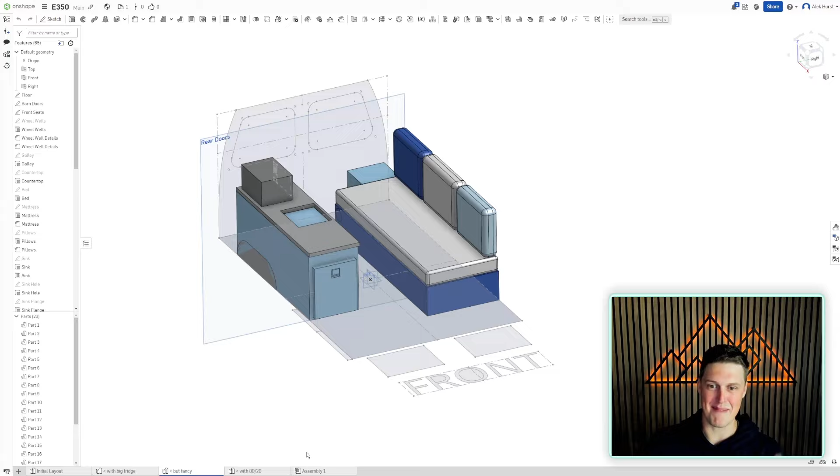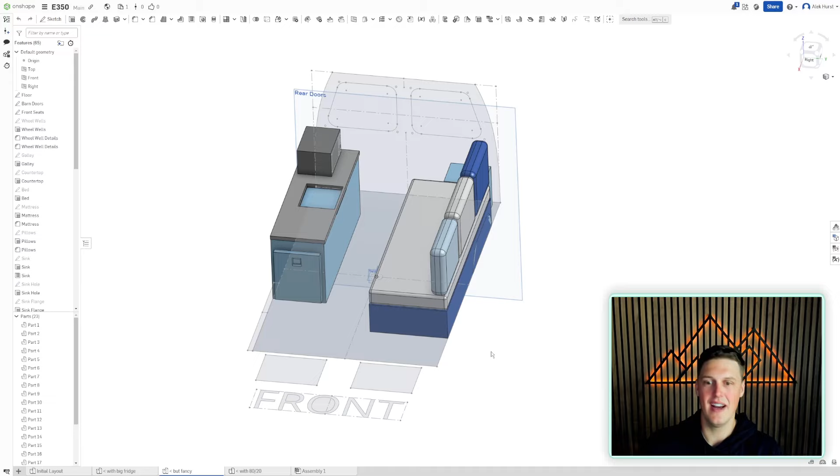This right here is the current version of my newest van layout, the E350 that we are doing on this channel. But this particular video is not going to be talking about my layout. This video is going to teach you the bare basics on how to create your van layout. First part of the video, I'm going to talk about why OnShape and why this is my new favorite tool for designing vans. And then we are going to get into the tutorial section where I have basically stripped down all of the complexity from OnShape into only a couple of different tools that you'll need in order to actually achieve an entire van layout.

Okay, so part one of the video, why I think OnShape is the new best tool to design your van layout. I've had this channel for, I don't even know now, 5, 6, 7 years, something like that. In the last couple of vans that we've built, I've shown you how to design your van layout in a tool called SketchUp, which is a very similar tool to OnShape. And I used to think it was the best for designing these van layouts. And actually, when I first started getting into the design for this particular van layout, I first started by going to SketchUp since that was the tool I knew and loved.

And I tried to get started, but it turns out that since I've used SketchUp the last time, which was about 3 years ago, a ton of stuff has changed. It's like kind of free, kind of not free now. There's tons of upsells in the product. They've completely changed the UI. And within about 5 minutes, I realized, okay, this is no longer the tool that I want to use for my van layouts.

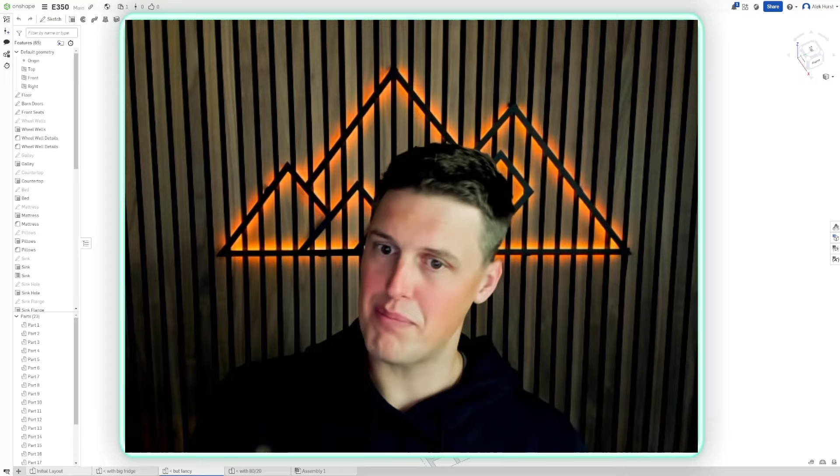Next reason why I think this tool is great is not only can you design your van, but you can graduate from designing your van into designing real engineered parts for a 3D printer. That might sound crazy to you. You might think, oh, I'm never going to get into 3D printing. In this day and age, 3D printing is getting more popular. It's actually incredibly useful for just designing little one-off parts for your van build. And if you start by learning OnShape right now, it's going to be way easier for you to design and print your own 3D parts if you ever decide to do that in the future.

And then last reason is kind of a bonus, but they do have a great mobile app, which is also free. I've been known to pull that up when I'm on a dinner date with my girlfriend and start blabbing about the van build and all the different things that I've thought about.

And that may or may not be her least favorite feature of OnShape, but I think it's really cool to just have the rendered 3D design on your phone so you can pull it up and look at it if you're kind of in that headspace and you want to think about a trade-off or make a different design decision. So that covers the initial blab session and why I think OnShape is now the best tool to use. Let's go ahead and dive into the actual tutorial here.

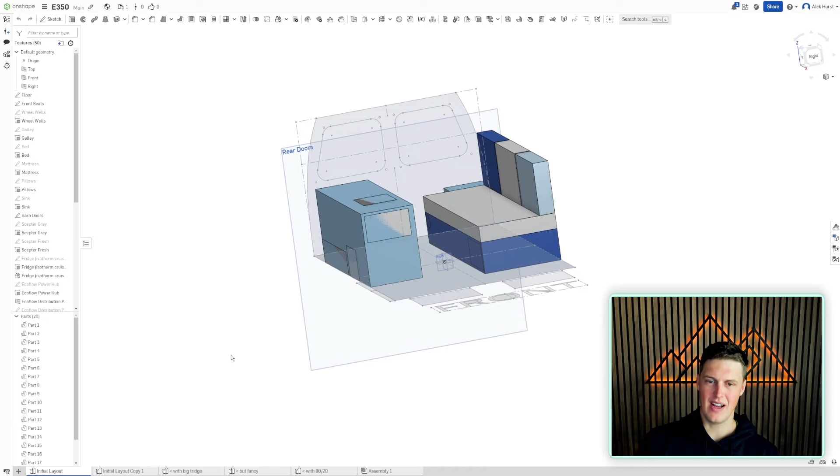Okay, so we're gonna start from a completely clean slate. I'm gonna go back to my OnShape home screen. This is where you're gonna get dropped into the moment after you create your free account. You're gonna go to the Create button on the top left. You're gonna go to Document. We can just call it Tutorial.

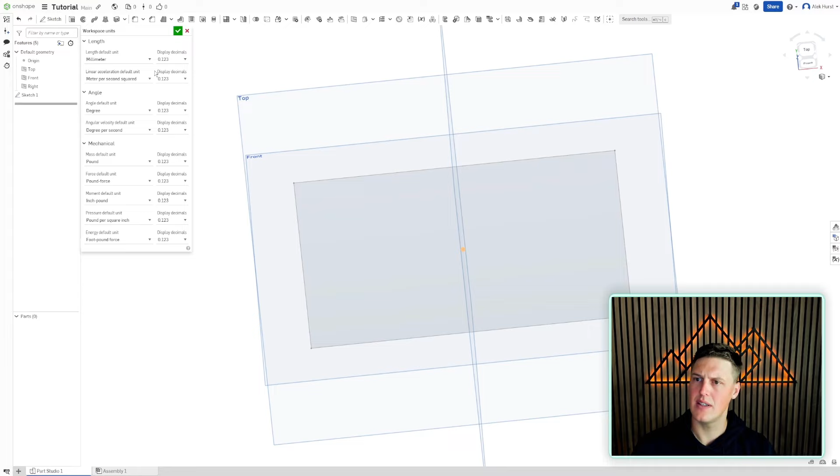Create Public Document. Oh, I do wanna make sure that our document here is in inches and not millimeters. I work in millimeters when I'm designing small parts and I work in inches when I'm designing big stuff. So to do that, I think we come up here, we go to workspace units, and what do you know? It's in millimeters, so change it to inches.

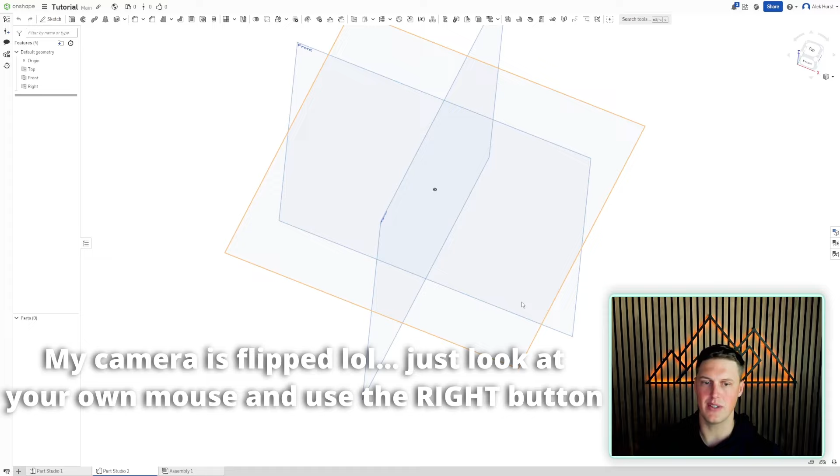So before we start actually designing anything, there's two functions that you're really gonna need throughout the entirety of actually building stuff. First one is being able to rotate the screen that you're looking at, which you do by just holding the right mouse button, this one right here. Hold it down, drag your mouse around, you can rotate the design. You can also use this little widget up here to do rotation of the view you're looking at. And if you click on a particular surface here, like top, it will rotate the view to look at that particular surface.

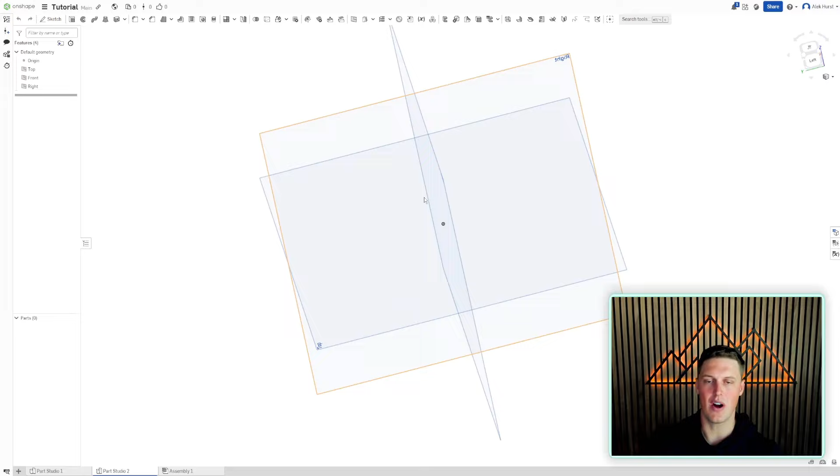Next thing we're gonna do is pan, which is different than rotate. This one's rotate, this one's pan. You can pan your drawing by clicking down on the scroll wheel of your mouse in the middle of your mouse and dragging your mouse around, just like that.

So the first mission that we have is to create the floor of the van. But in order to do that, I need to take a step back and teach you guys the first tool, which is kind of the core foundational tool to OnShape. That is called the sketch tool. The best way I like to think about it is it's basically just a piece of paper. And as with a piece of paper, you can draw any two-dimensional shape on it.

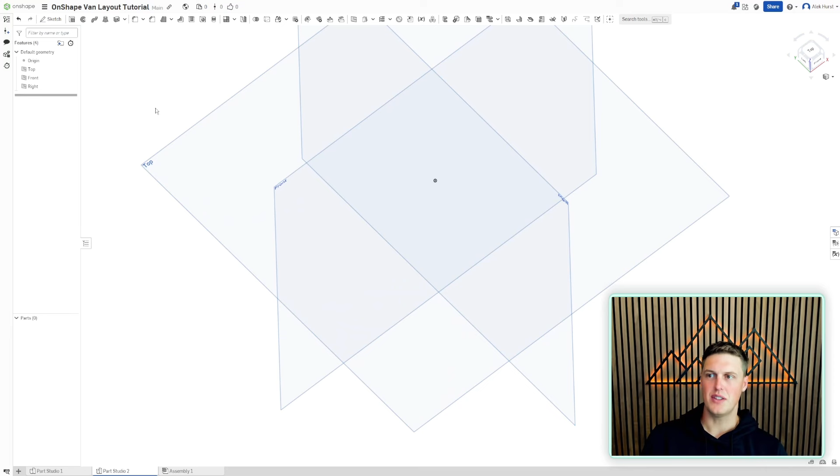You can use the sketch tool by pressing this button on the top left here, and you have to assign the sketch to sit on a particular plane. So let's select the top plane. And at this point, you can draw any two-dimensional shape on this sketch, just like this. Then you can apply different operations to these two-dimensional shapes, such as an extrude, to eventually create three-dimensional parts.

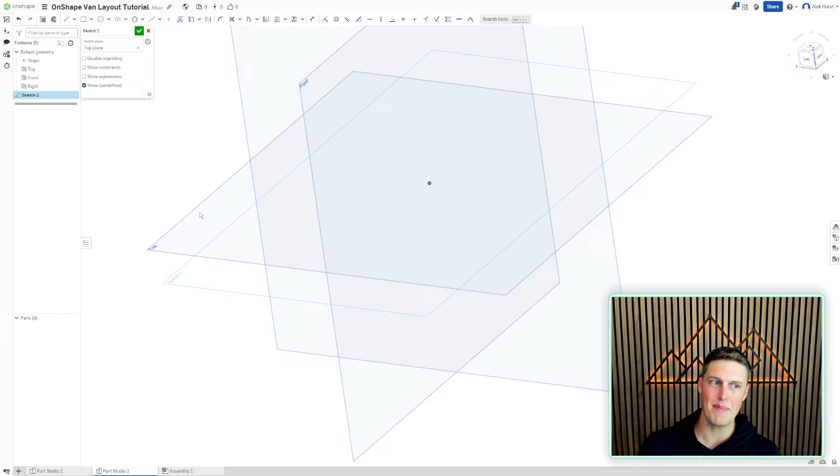And the reason that you have to start with a sketch and a two-dimensional shape in any real CAD tool, such as OnShape, is because it just forces you to take each step explicitly. It gives you a lot more fine-grained control and ability to go back and change things while leaving the entire design to exact specifications. I know it took me a while to understand what a sketch is and why you draw your two-dimensional stuff on there first. I think it'll make more sense as we progress through the video. So we have our first sketch. Let's go back to the top perspective here.

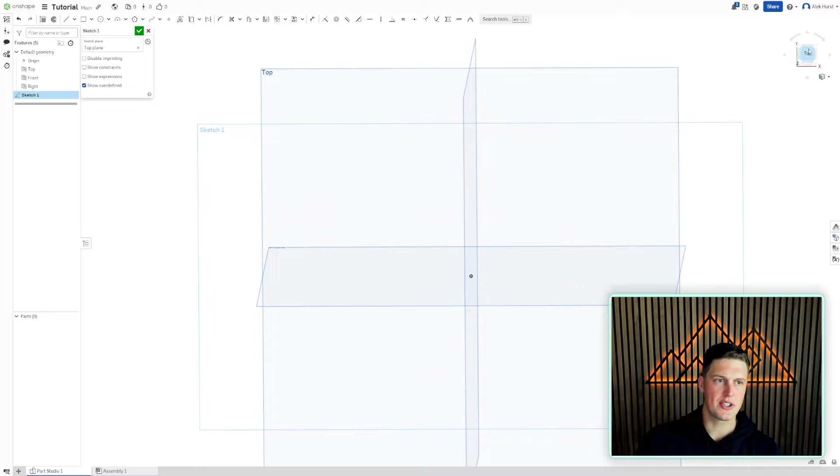Now, if we want to create the most basic version of our van floor, we need to first go get the dimensions of our van floor. If you're working with a modern van, like a Sprinter van, the dimensions for your particular van are readily available on a ton of different places. For us, with our E350 van, I had to go out there and use a measuring tape because, believe it or not, I had trouble trying to find the dimensions of the floor and the ceiling space on the internet.

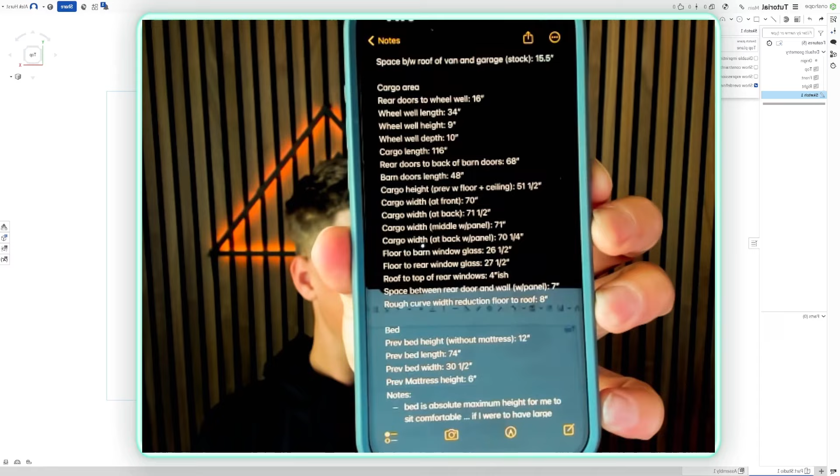You can see here, I took a ton of measurements on my phone. Hopefully that's clear enough on the screen to actually see. But I just went in there, went buck wild with my tape measure and got as many different measurements as I could get. And we are now going to create a rectangle that represents the floor of our van on this sketch. So we're going to draw a rectangle on the piece of paper, is how I like to think about it. You have to have the sketch open so that we can draw this rectangle within the sketch.

Then you'll see this rectangle tool. Click center point rectangle. Click the origin. You'll see it highlight orange when you have it fully selected here. The origin is just the very center of this entire three-dimensional space.

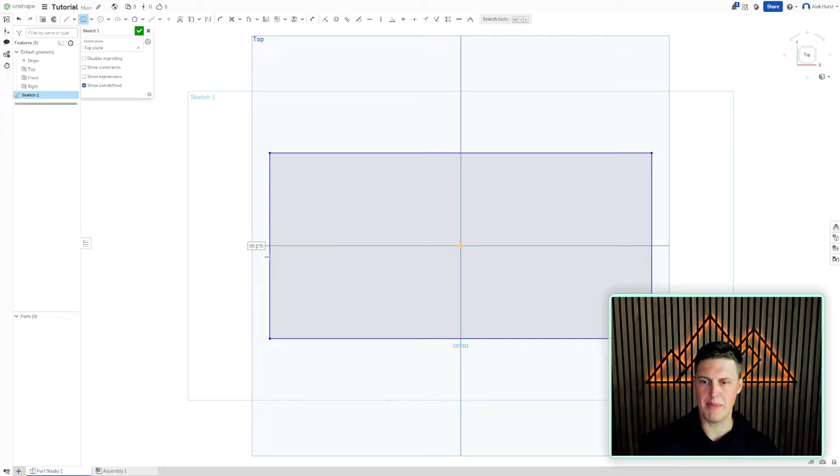If you click the origin, it sticks the center of our rectangle to the center of space, and you can just create a rectangle. There's a couple of ways to basically assign the dimensions that we've measured to the rectangle. We haven't done anything after we created the rectangle here, so you can see the dimensions are highlighted. If you press 0, it'll let you modify that text field. Don't ask me why you have to press 0 first, but that's just what you have to do so that you can edit the number here.

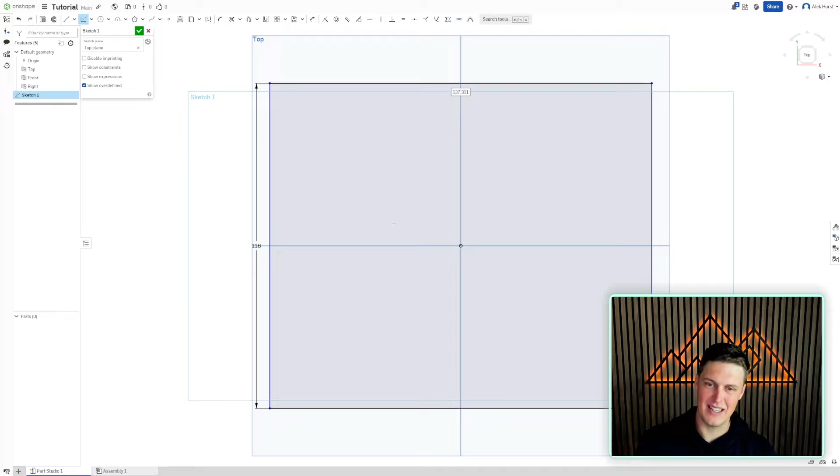Our cargo length is 116 inches. Oh, shoot, that was width. Let me redo that real quick. Center point rectangle, click origin, drag it out. Now we're on length, 116 inches long, and then 71 inches wide. So this is our cargo area.

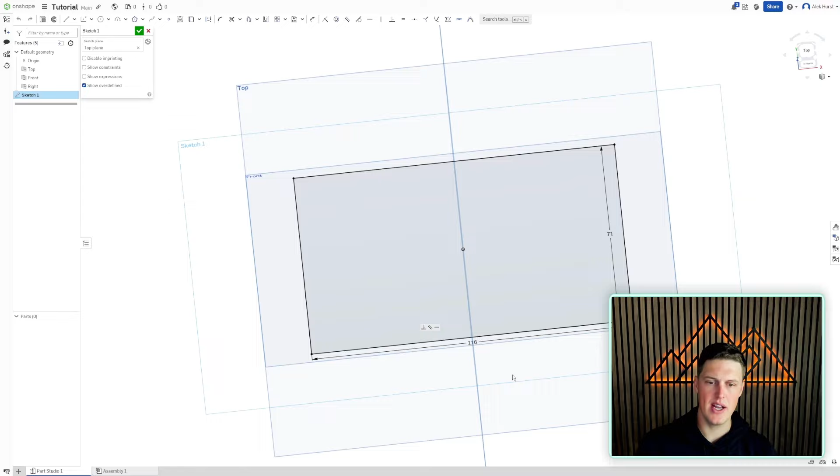If we click the check mark here, that basically just says we're good for now, but you can always go back into this sketch. You can change the dimensions, which is really nice when we start moving stuff around. So now we have our two-dimensional floor in sketch 1. We can right click it, rename it, call it floor. We have our floor. Now we want to create a galley unit on top of the floor.

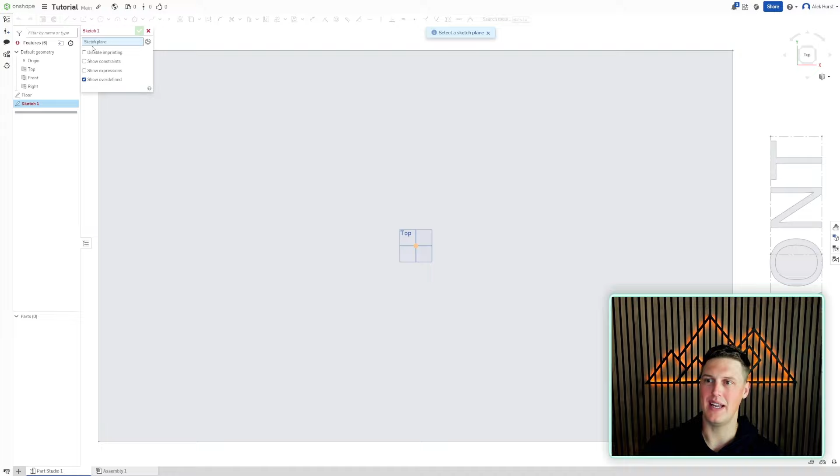What do we do when we want to design things on a two-dimensional piece of paper? We create a sketch. We need that sketch to exist on a plane. This time, we want that to be the plane of the floor itself. So we clicked on the floor rectangle that we just drew. We can create our rectangle, which will represent the galley unit. Let's go ahead and do a corner rectangle for this one.

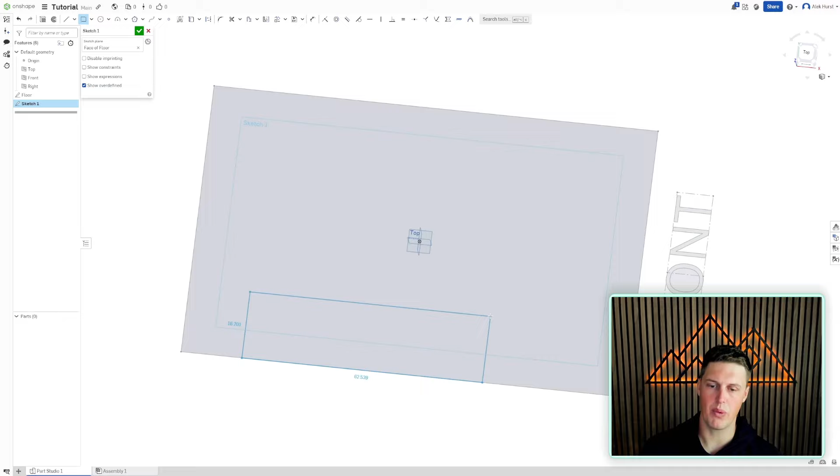Now, if we basically hover over one of these lines on the floor that we just created, you can see it turns yellow. That means that the rectangle that we're creating is going to be bound to that line, which is what we want in the case of the galley unit, since we want it up against the wall. So I'm hovering over this line, I'm clicking, and I can drag this corner rectangle out. Let's drag it to about there.

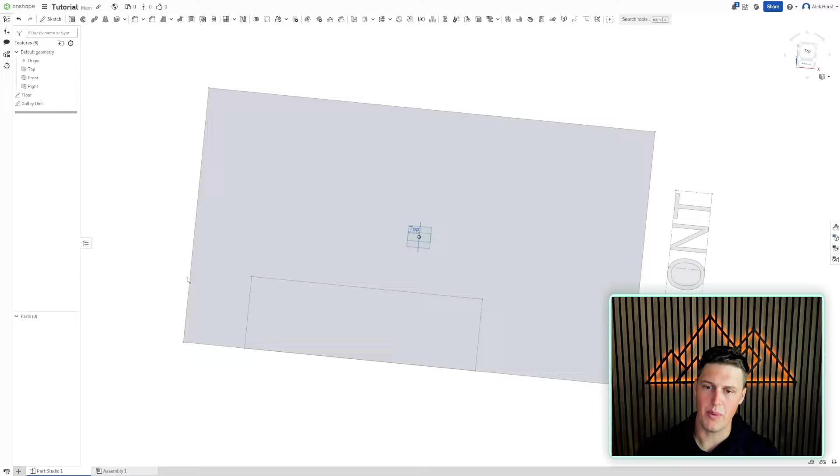And the dimensions of the galley unit that we want to create for this tutorial, it's going to be 60 inches long, 20 inches wide. This is a small van. You'd make a bigger one in a Sprinter van, but in this E350, our galley unit needs to be teeny tiny. If we press check, we'll rename this one to galley unit. We have two pieces of paper laid directly on top of each other, one of which has the floor and the next one has the galley in it.

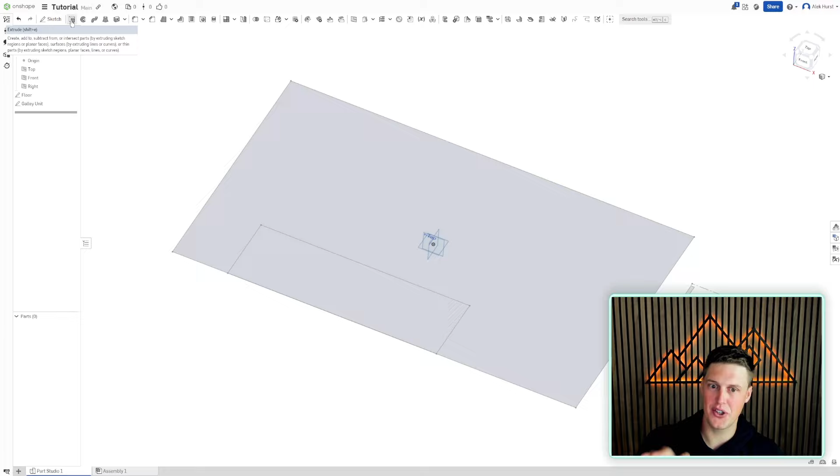If I kind of hover around, I can hover these shapes individually, which is going to lead us into the next tool, going from two-dimensional space to three-dimensional space. The way that we're going to do it, and that you can use to design 99% of your van, is going to be the extrude tool. The extrude tool takes a two-dimensional shape that you've drawn on a sketch and extrudes it into the third dimension. So we can click the extrude tool.

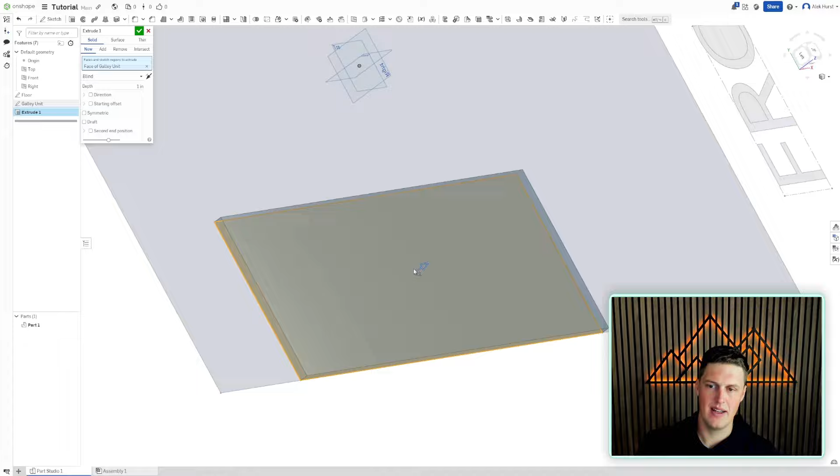We can click on the galley unit that we just drew. Let's see if we can get a good selection here. See, it's selecting different things as I hover around. We want to have it so that the box or rectangle that we just drew highlights in yellow. I'm going to click that. And you can see that it's now starting to extrude into three-dimensional space. They give you a bunch of different options here.

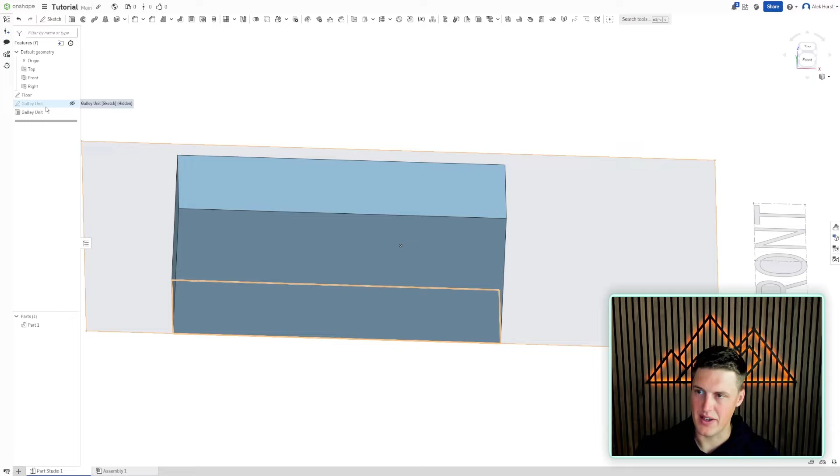We're not going to change any of those options except for the actual depth, which in our case is going to correspond to the height that we want the galley unit to be. 26 inches. This is also the galley unit. I'm just also going to call it galley unit. You could call this galley unit extrude and call this one galley unit sketch, but I just prefer to have them all called galley unit, and I get used to what these icons mean, and I can find the sketch or the extrude depending on what I'm looking for.

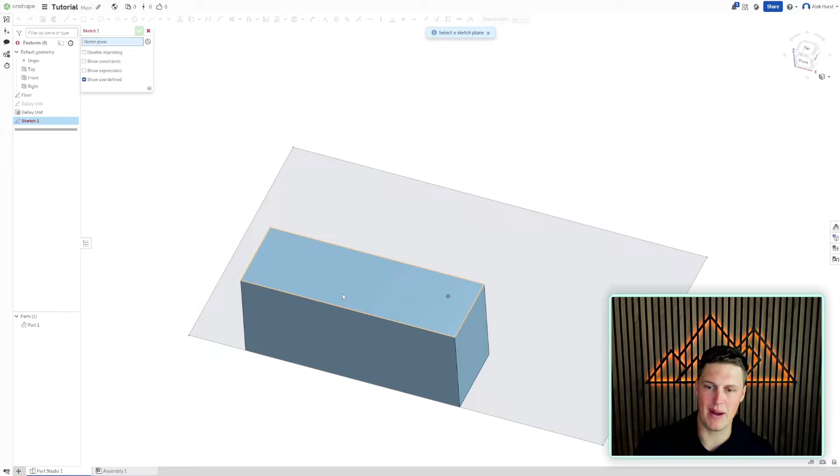Okay, so the next task that we have is to add a sink to our galley unit. That's going to work very similarly to how we just created the galley unit on the floor. The only difference is, let's create a new sketch by clicking the button here. The plane that we want this sketch or two-dimensional version of the sink to exist on is the top of the galley unit. And we're focusing on keeping everything in the shape of a box because honestly, that's the best way to do a simple version of your first van layout.

Make sure you still have your sketch open, click the rectangle tool, and we can draw a rough rectangle. The particular sink that I'm using, I'm going to link that in the future build videos, but it happens to be 18 inches by 18 inches.

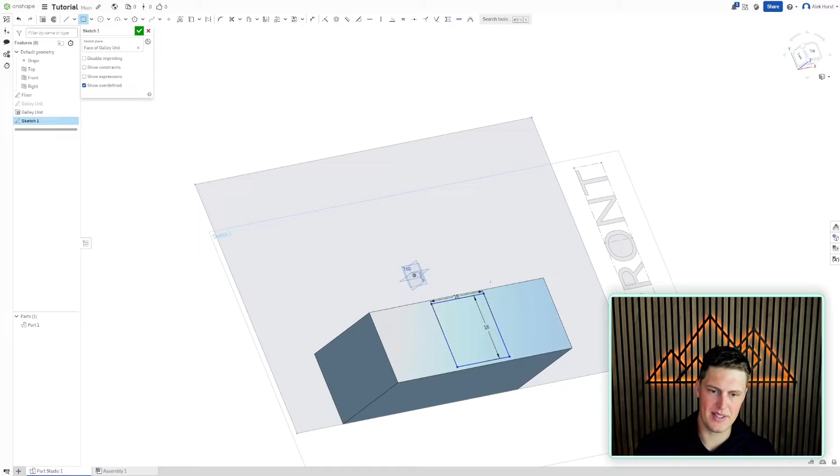You can see that it kind of centered itself perfectly on the galley unit, which is ideal. Let's say that this rectangle got created in a bad spot, so I'm going to delete it and recreate it over here, where we know it's not going to be where we want it. 18 by 18 inches. In order to move this square to the right place on the countertop, you want to highlight it. Then you want to press the drop down on this tool right here. Click the drop down, and you want to select the transform tool.

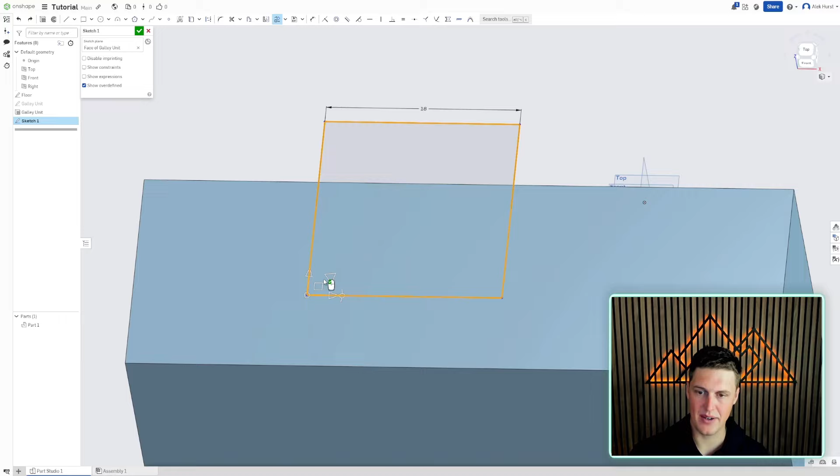Then these little handles are going to appear on the two-dimensional shape that we just created. There's a few different options here. You can move it in one direction. This will force you just to go up and down. You can move it in the other direction. You can force it to move just left and right. You can drag this square here, which lets you move it in both X and Y directions.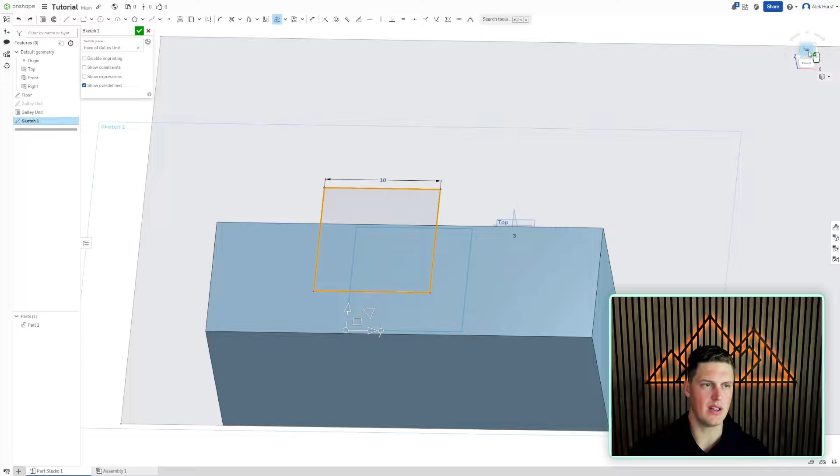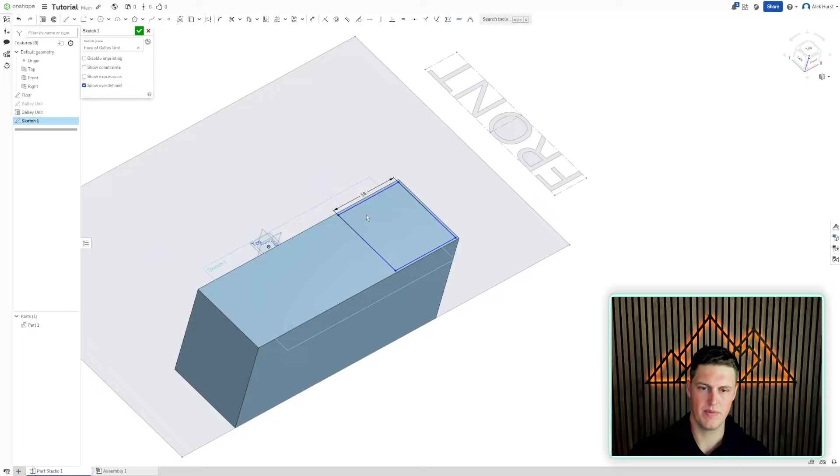And it's kind of hard to tell exactly where we are. So let's click the top perspective so that we can look exactly how this thing is relative to the galley unit. Let's put our sink over here where a lot of people decide to put their sinks. It has a little mouse icon with the green check mark on the top left button of the mouse. So I'm going to click, and that effectively moves our sink on this sketch plane to a new place. Let's go ahead and say we're good. Let's rename this to sink.

And in the same way that we created the galley unit, let's extrude the sink so that we have a three-dimensional object. It's going this way. We want it to go down into the galley unit. So we're going to click this arrow. This is opposite direction.

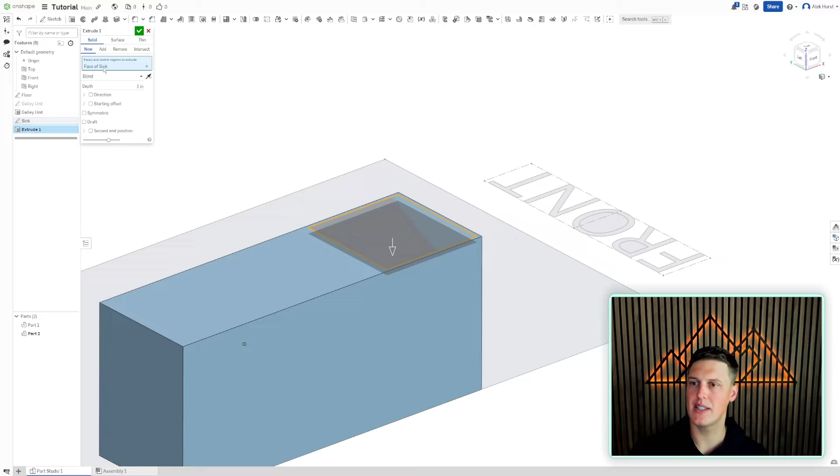Something a little bit complex here. When you're doing extrusions, you can do all sorts of different types of extrusions. We want to make sure that every single time we're doing an extrusion, it has the new selected. That is going to create a new object out of the extrusion and allow us to change this sink independent of any of the other objects that we've created. Anyways, make sure the new tab is selected. I believe my sink is 9 inches deep. So let's do 9 inches of depth and we'll press done.

And at this point, you might be like, okay, I'm very confused. Where did the sink go? I can only kind of see it at the top of this counter. Well, you can see in the bottom left here, we just click this little eye and it will hide and unhide, which doesn't change any of the engineering here. It's just like a visual hide and unhide.

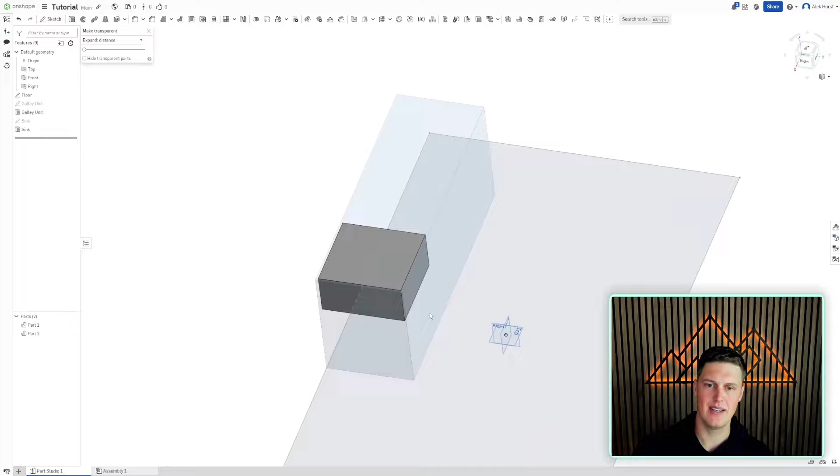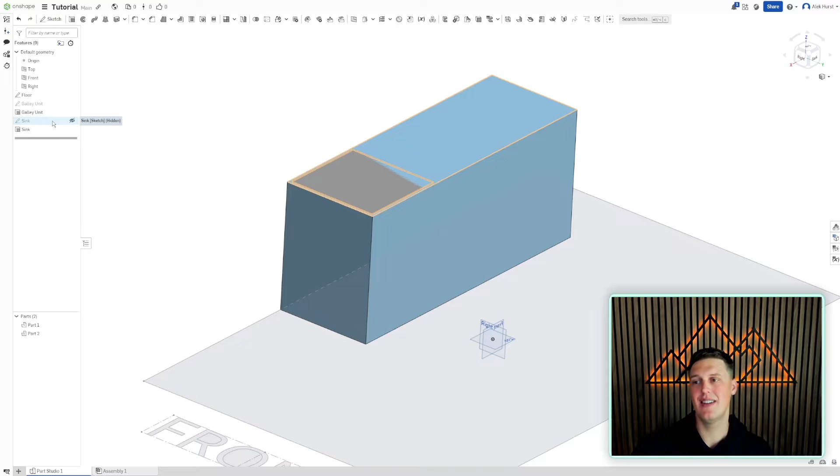The top left list of items here is our timeline of operations that we've done in this document. So the very first thing we did, the floor, is always going to stay at the very top here. It's the first operation that we did. Then we did the sketch for the galley unit, the extrusion for the galley unit, the sketch for the sink, and the extrusion for the sink. As you create more steps, they will automatically grow from the bottom here. And in our very simple use case, we're not going to be dragging these things around or changing the order of things. You can just always create new sketches and new extrusions, and it's okay that they fall at the bottom.

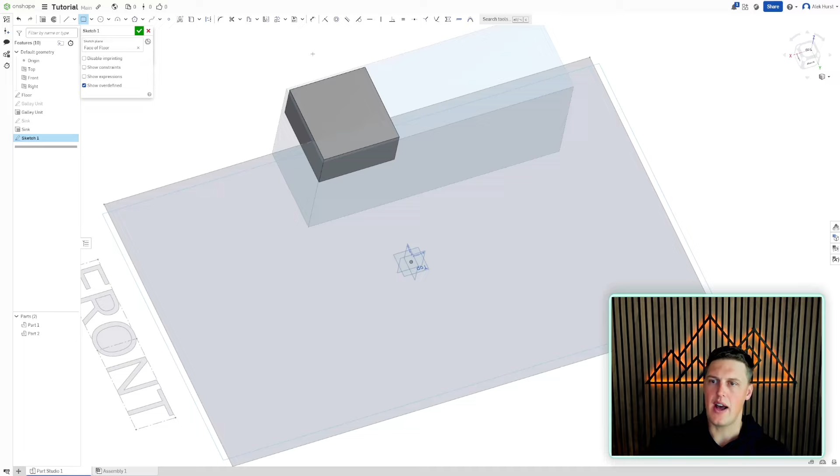So now let's go ahead and add a fridge to our galley unit. Let's go ahead and create the sketch. We're going to draw a rectangle, 24 inches wide. For simplicity's sake, let's just call it 20 inches deep. Extrude. Make sure to press new. Call it 22 inches tall. Our fridge. And as you guys can see, we're really just doing the sketch, draw a rectangle, extrude that rectangle for every single component inside the van.

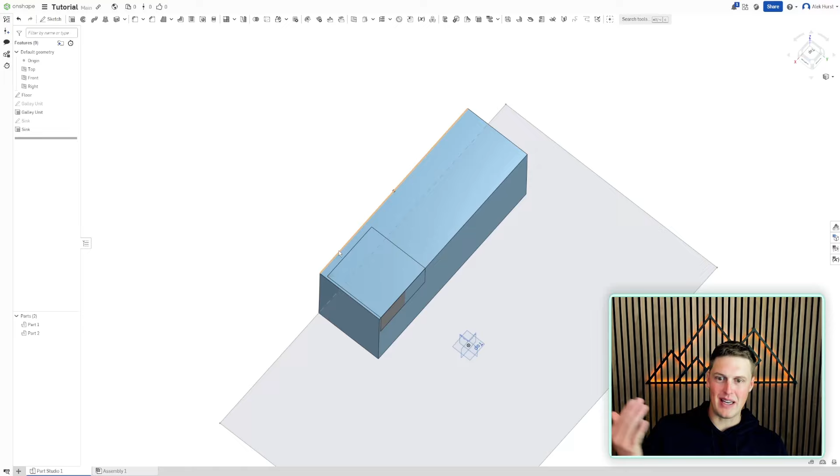For the next lesson here, I'm going to explain a feature of Onshape that you're going to need a lot as you're designing your van build. And that feature is determining the distance between 2 points or 2 lines. In Onshape, this is very, very simple. You just click line number 1 and you click line number 2. And in the bottom right-hand side of the interface, it shows you how much distance is in between those 2 parts. If you select a bunch of things and you want to get the things deselected, you've got to find an open space that has nothing behind it and click that.

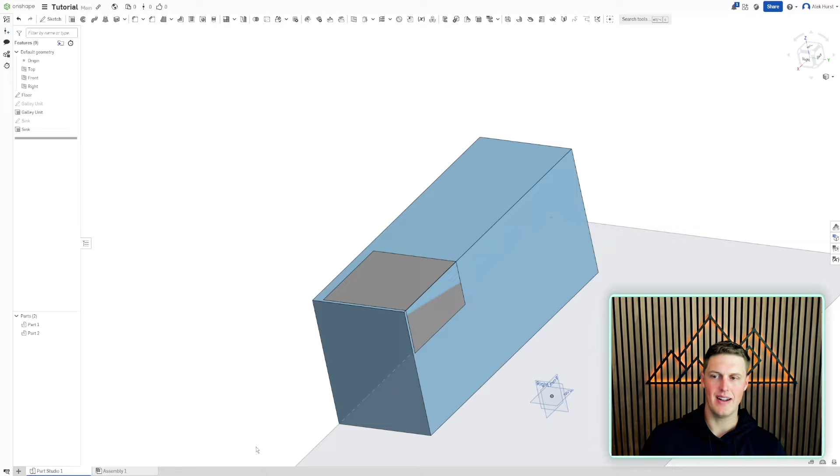That is the only way to deselect your selection. So if you've measured something and you've realized, I want this to be a different distance, I will show you guys how to do that right now. Anytime you need to change something, the first way you want to think about doing that is by going back into the original sketch. So if we want to change the distance this sink sits inside of this cabinet, let's go back into the sink sketch.

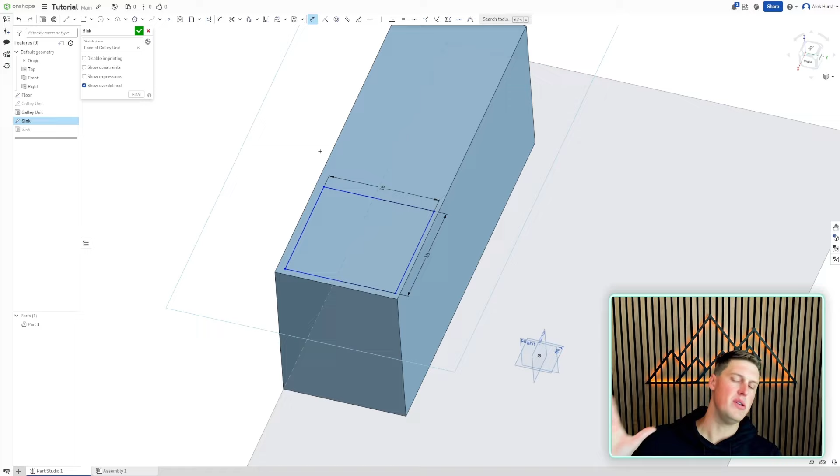So I've already taught you guys the transform tool, which allows you to just drag this thing around to have a rough placement of where you want it. But if you want this to be an exact distance from, let's say, the back of this counter, we're going to use what's called the dimension tool. The dimension tool is like this automagical tool. You can do angles with it. You can do dimensions of a shape. You can do dimensions between shapes. And it's kind of just smart.

So the way that it works is you just click the things that you want to apply a dimension to. In this case, click this line, which is the back edge of the sink. And we click this line, which is the back edge of the counter. And that gives us a number that we can enter here. Let's call it 1.5 inches. If we enter that, it perfectly places the sink 1.5 inches from the back of the counter.

The challenging part about the dimension tool is this is going to bring us into the world of what are called constraints. So each one of these dimensions is a constraint on this particular sketch, but there's lots of other ways to provide constraints as well. And what you often run into is a much more advanced topic. Let's say we put a second dimension between the sink and the counter and we call it 1.6 inches. The sketch fails to resolve and you can't move forward.

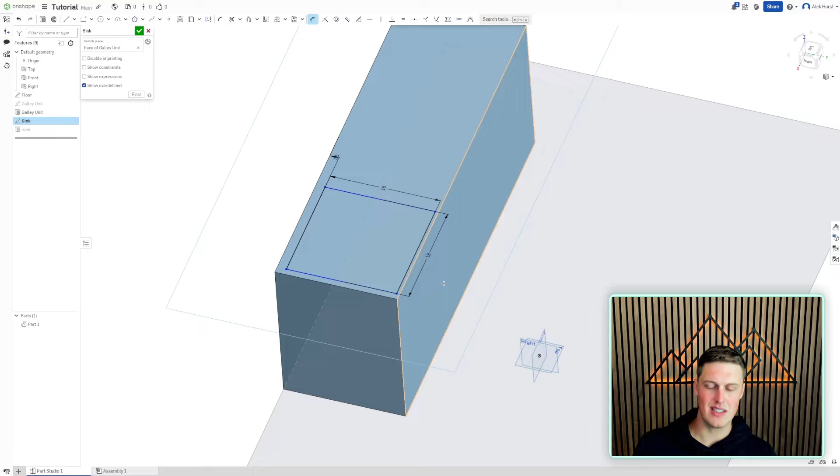If your sketch does turn red like this, you basically have to delete constraints until it can resolve itself. And if you can't delete the constraints so that it can resolve itself, which does sometimes happen just due to the nature of how complex this is, thankfully, I've taught you how to keep these sketches very simple. Just delete this singular sketch and recreate it.

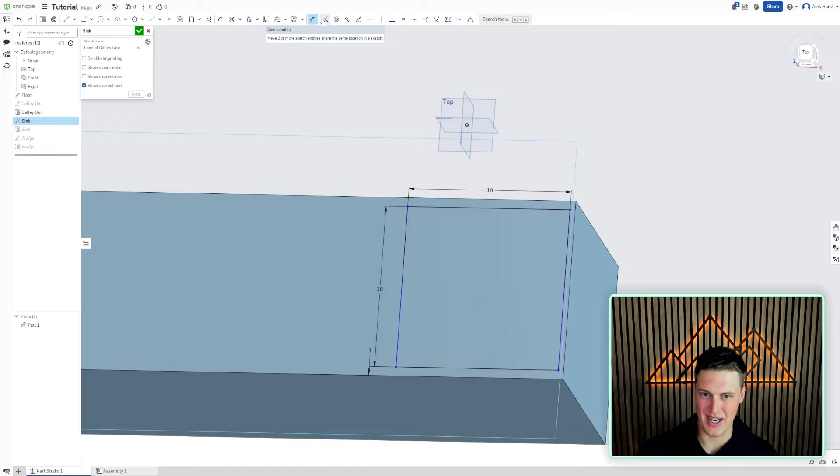Very last tool that I want to teach you guys is somewhat similar to the dimension tool. When you add a dimension, it creates a constraint for that particular portion of the sketch. We're also going to teach you guys a new tool to create another type of constraint on the sketch that happens to be very useful when you're designing a van layout. That is the coincident constraint. So we still have the sink sketch open here. Let's say we really wanted the edge of the sink to align exactly with the edge of the countertop.

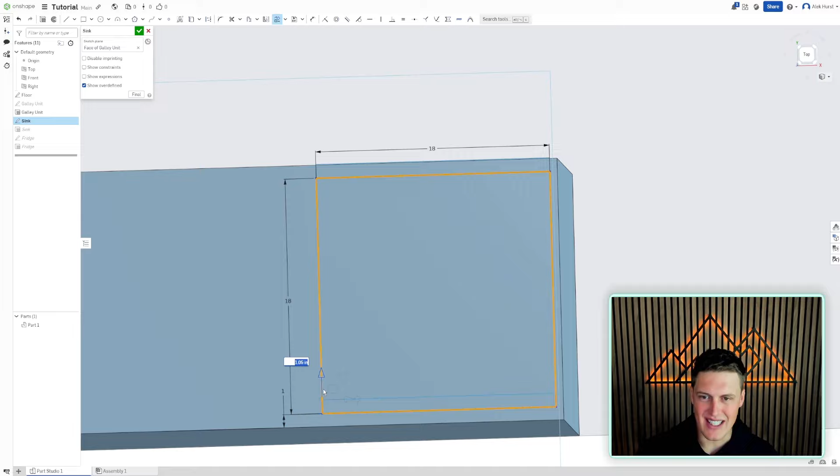You might think it's easiest to do what I taught you guys earlier and highlight the rectangle, use the transform tool, and then go like this. That's not a terrible way to do it, but you're never gonna get this exactly on this line. If you want this edge to line up exactly with this edge, you take what's called the coincident tool. It's right next to the dimension tool. I'm sure there's a good scientific explanation for how this coincident tool works, but in my mind, the coincident tool allows you to click two things and they just stick to each other exactly.

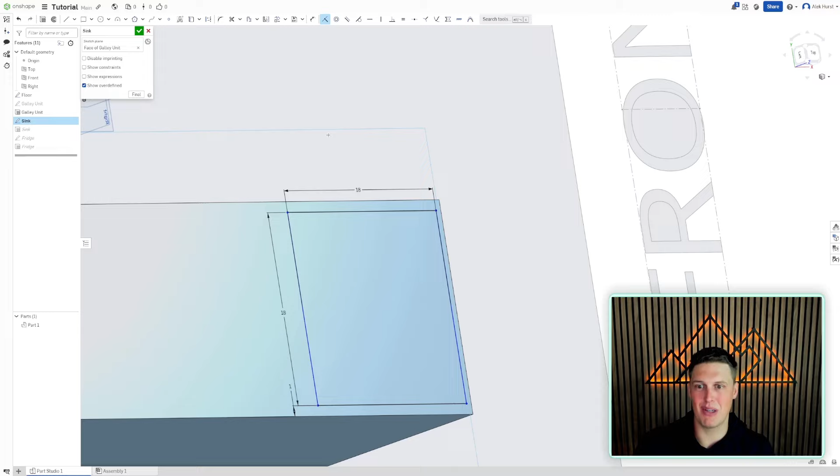You can do coincident with points. You can do coincident with lines. In this case, let's do a coincident with a line. So let's say we want to align this edge of the sink with this edge of the countertop. We can use the coincident tool to do that by clicking the coincident tool to activate it, hovering over the edge of the sink, clicking the edge of the sink, it turns extra yellow, and then hovering over the edge of the countertop, clicking the edge of the countertop. You can see the sink moved so that it perfectly lines up with the edge of the countertop here.

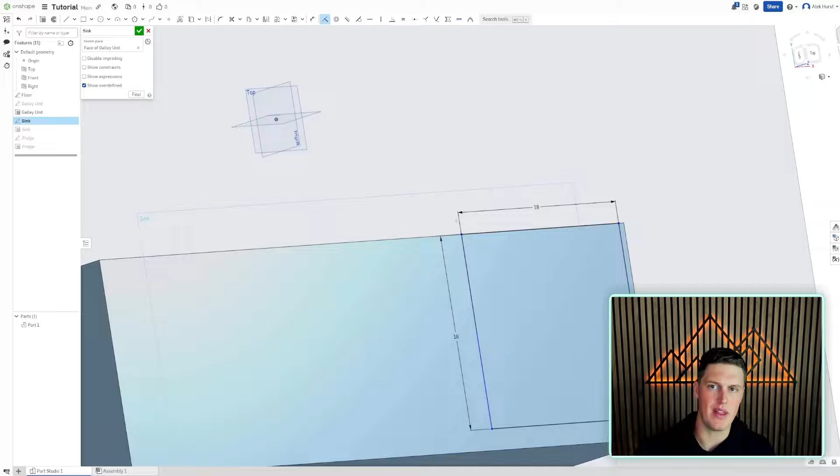So now if we press the check mark on this sketch, that extrude that we applied to the sink sketch has followed it, and we've effectively moved the sink. So that was my version of trying to teach you guys the absolute basics of Onshape.